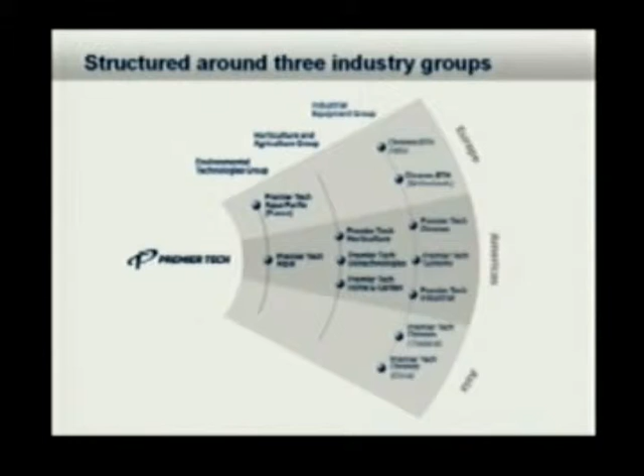Back to the Environmental Technologies Group, we work in smaller flow with the Ecoflo biofilter. Just to mention that if there is any commercial project, a small project, we can use 2 or more Ecoflo units, put the Ecoflo in cluster to handle small flow, let's say from 2 to 15 cubic meters per day.

We have a more commercial system, which I will discuss today, and we have municipal and industrial systems with the SBR, that is for sequencing batch reactor.

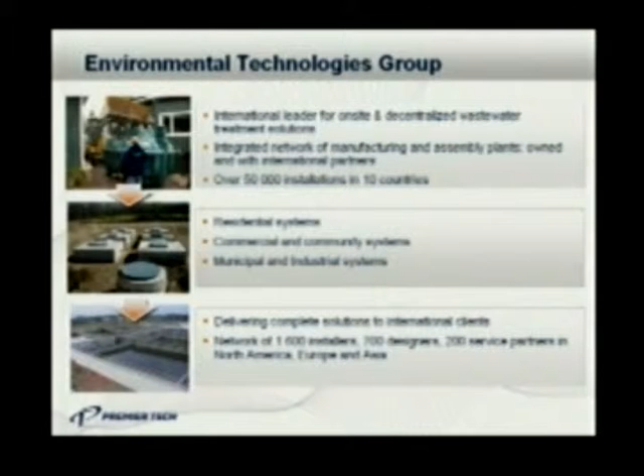The first product I will talk to you about is the Rotofix. If you have to deal with a domestic type of wastewater, if the requirement for effluent is not too high, in the 20-20 range for BOD5 and suspended solids, the RotoFix is a nice unit to work with. It's a RotoFix, it's an RBC, that's for rotating biological contactor. It's also known as a biodisc.

We developed the RotoFix based on the biodisc technology, but we wanted to improve the biodisc. There were some problems associated with biodisc in the past, one of them being the accumulation of biomass in between the discs. With our product, the media is parallel to the main shaft, whereas with a typical biodisc it is perpendicular. In the past, that perpendicular setup led to accumulation of biomass in between the discs, and eventually mechanical problems. With the RotoFix, because the media is installed like that, the biomass that accumulates on the support gets washed out, so there's no accumulation of biomass and no mechanical problems associated with that.

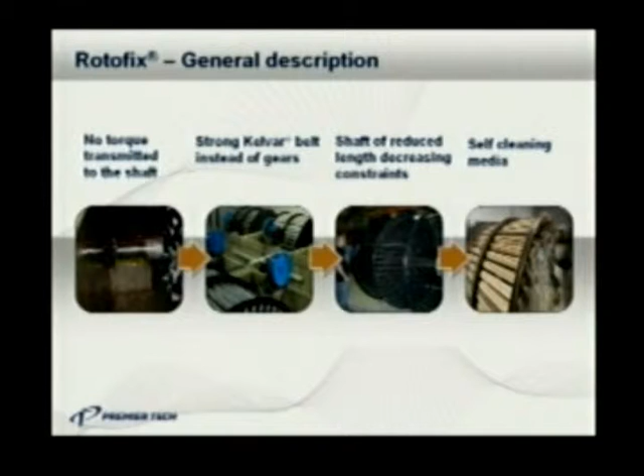So what you see is a very simple way to drive the drum inside the wastewater. It's an electric motor, gearbox, pulley, and a strap, basically, and it's all installed in a drum, and the drum is installed in the wastewater tank.

You see here the flow diagram. We have a septic tank, and then we have an equalization tank, because the wastewater is not generated evenly during the day, so there is peak flow during the morning and evening. We typically have an EQ tank to pump the wastewater to the wastewater treatment system. Here we use an agitator to mix the solids together with the liquid before we go to the treatment, and then after we have the treatment.

This is the treatment part here, and over there is a decanter. Let's check if it starts.

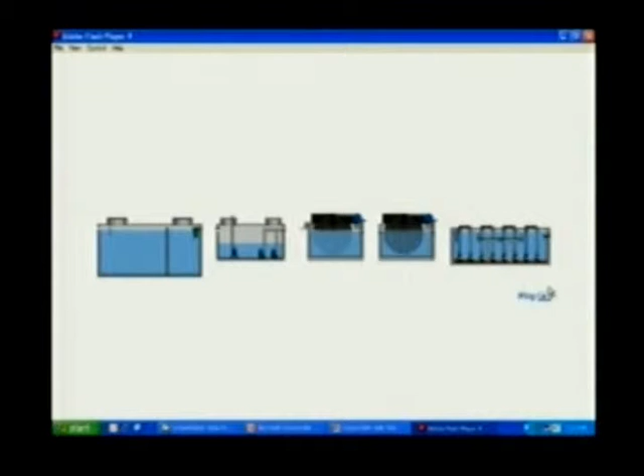So you have your septic tank. The solids will accumulate at the bottom of the tank, and the fat and grease will stay on the surface. Here we have an effluent filter in the septic tank. So we feed the EQ tank, and the pump will pump to the treatment system.

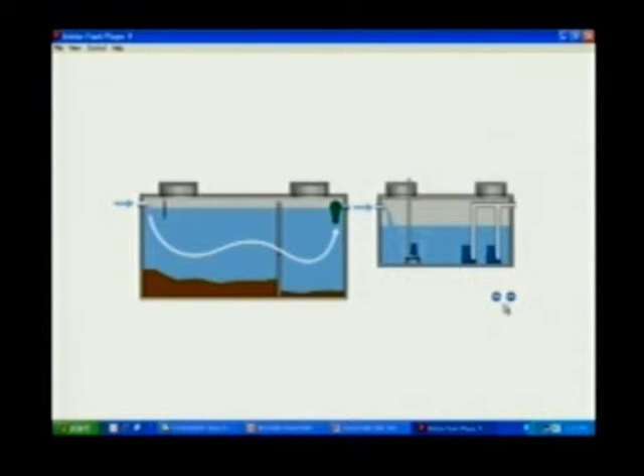In the RotoFix, you have rotation of the drum into the wastewater. When the media goes into the water, there is air in between the spaces in the media, so the air will blow out at every extremity of the media, giving you aeration. When the drum goes out of the water it will flow down into the system. That's a very economical and efficient way to have good aeration and agitation in wastewater.

The bacteria will grow on the media. They have food there, they have water, aeration, so that's a good condition for the bacteria to grow and to remove the contaminants from the wastewater.

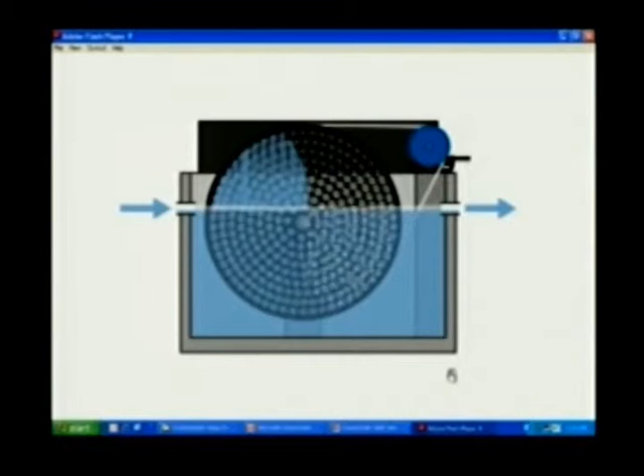After that, the water will go into the decanter. This is a device designed to separate the suspended solid from the wastewater. The bottom of the tank has a conical shape, and the sludge will accumulate on the bottom.

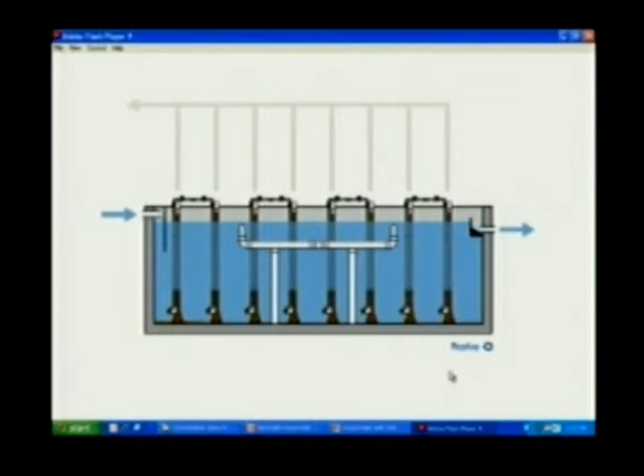Here there are two lines. One is a compressed air line that pushes compressed air, creating an airlift system, meaning that when you introduce air into the water, the density will be less, and this will pull the sludge together with the water upstream, eventually going to either the septic tank or a sludge tank.

In the decanter, we also want to remove floating material that accumulates on the surface, because sometimes gas is generated and some of the solid will float. We have a valve, and when we open it, the floating material goes to the same place as the sludges.

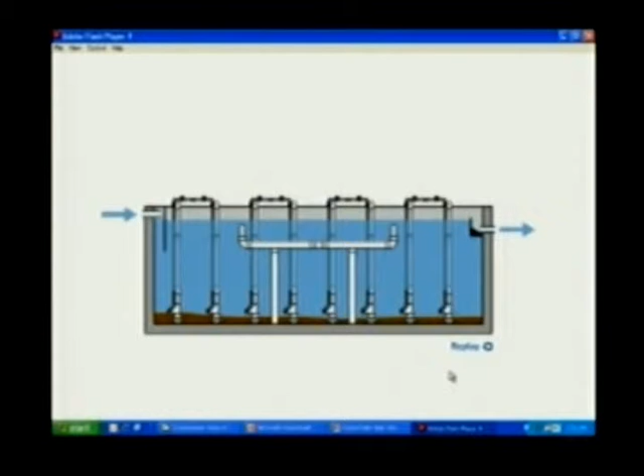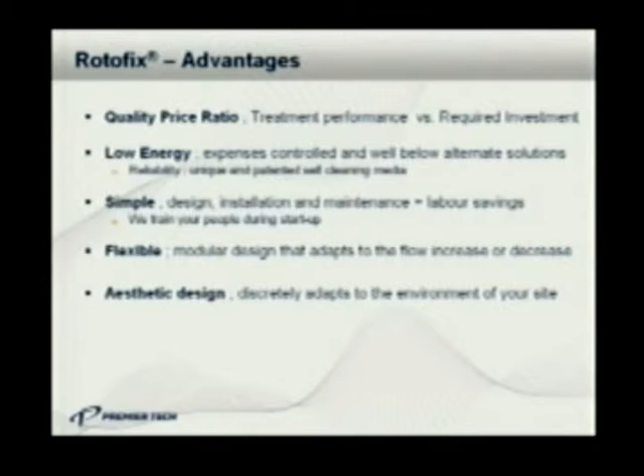The advantage of the Rotofix is a good quality price ratio, with a very low energy motor to drive it, either 0.5 or 3/4 horsepower. It's simple, flexible, and easy to operate. If there's a problem and the motor needs replacing, it's very easily accessible for the operator. And when we mention aesthetic, it's because we can install the Rotofix in a small building that integrates with the local environment.

Some case studies: Mont Saint-Sacrement School, 35 bedrooms, designed for around 70 cubic meters per day, started up in 2001. It was installed to replace a recirculating sand filter. Now what you see here is the small building - all the wastewater treatment is installed inside. It's just beside the gymnasium for the school, and there's no other problem associated with the installation.

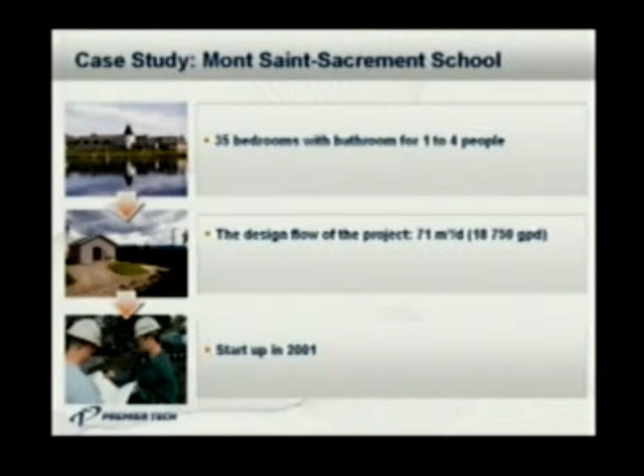Saint-Michel de Napierville is a township about a 20-minute drive south of Montreal. That's a new house development, about 100 homes, 125 in fact. The developer wanted to do an on-site system, but the soil condition was so bad it did not work - a lot of clay soil - and eventually the developer contacted us.

What we did was install an alternative system, meaning each house on this project has its own septic tank. So we can run a smaller diameter pipe than the conventional sewer system, and we don't have to go as deep in the ground because we can use a 1% slope rather than 2%.

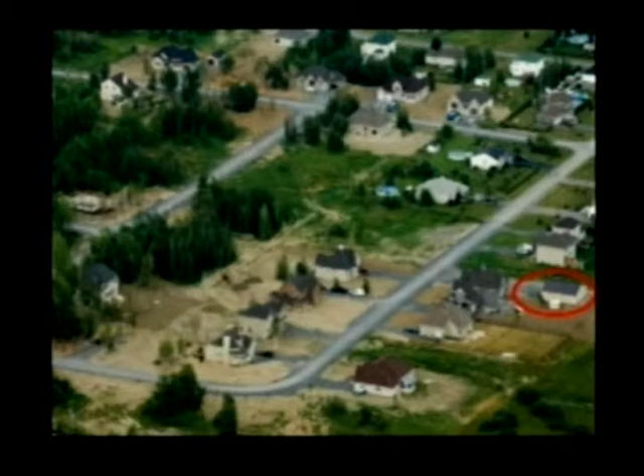We'll see it better on another slide, but here's the small building where it's installed. This developer did a second phase of the project and installed it in a different type of building because the new development has bigger homes. Just to show you, this is the wastewater treatment plant with the homes together - now it's a nice development that's all paved, and it has been in operation since 2006.

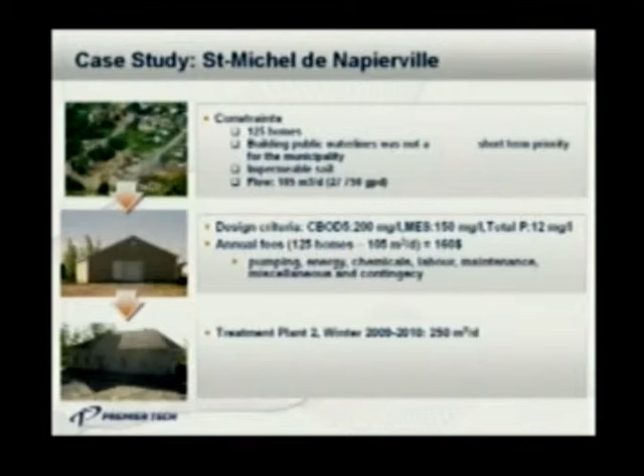I wanted to mention the operation cost of the system. Every home pays a local tax of $160 per year. This amount covers pumping of the septic tank every 2 years, pumping of the sludge tank at the treatment facility, as well as energy and chemical, because in this case they have phosphorus removal and use aluminum sulfate to precipitate the phosphorus into the last Rotofix.

Stanbridge East, 85 homes, a small township. This is a picture inside the treatment plant, 85 cubic meters per day. They have phosphorus removal and disinfection, using the same type of UV lamp that Danielle showed this morning, the Hallett lamp. Just to show you, we can arrange the plant so it looks okay - in this case, it has a sugar shack look.

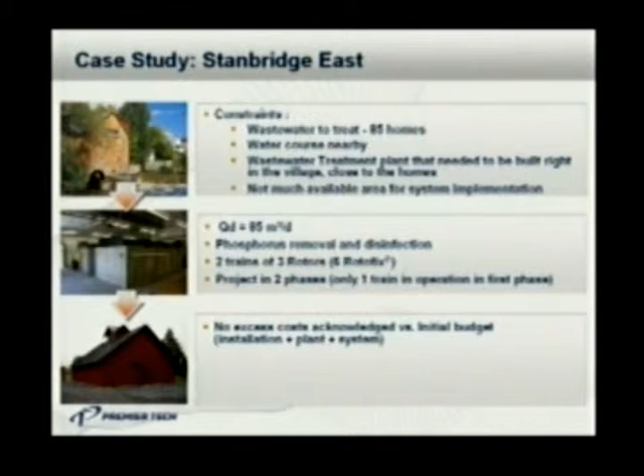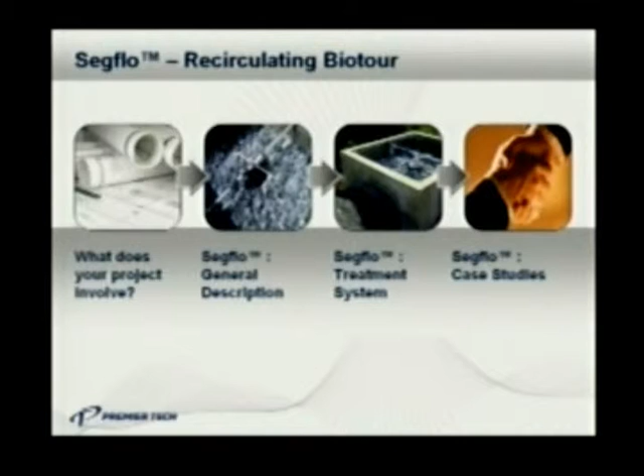Another product in our product line is the Segflo, a recirculating biotower. If the project involves higher strength wastewater, like a restaurant or grocery store, and if the flow is in the 5 to 100 cubic meter per day range, the Segflo is a nice technology to use. It can reduce the strength of the wastewater very much, and that's most of the time why we use this technology.

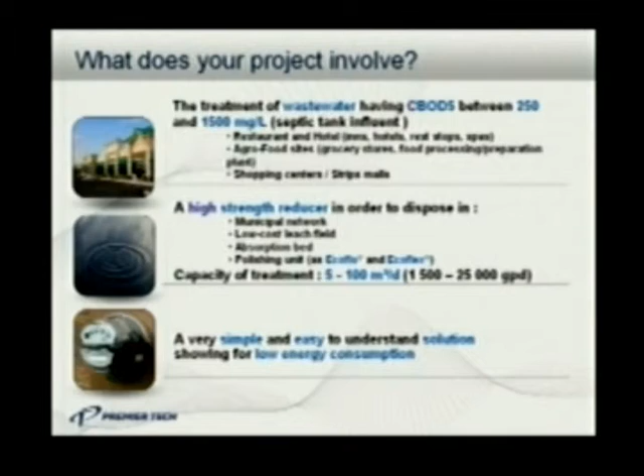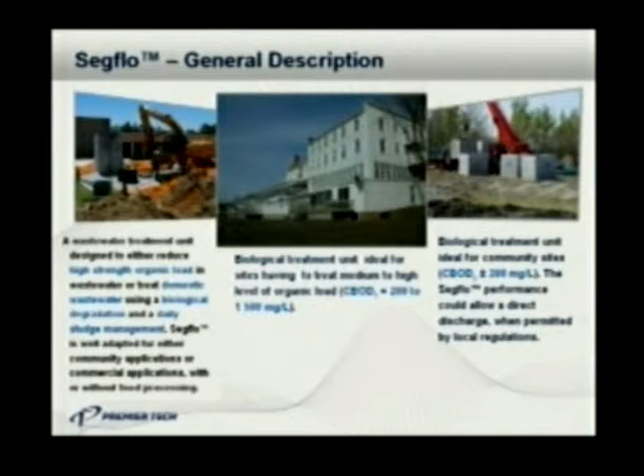How does that work? Again, we have the septic tank, EQ tank, just like with the Rotofix, but rather than use something that is moving as the media, with the Segflo we have a similar media as the Rotofix, but it's pieces of about 3 inches diameter and 3 inches long that is installed in bulk into the Segflo tower. The treatment happens in the tower.

Most of the time we will use a 2-stage tower. When we need extra capacity, we can use some systems in parallel to increase the capacity. And at the end of the system, typically we have a settling tank to remove suspended solids.

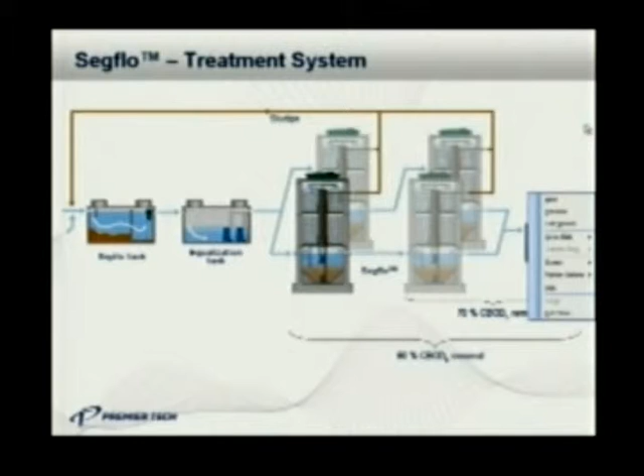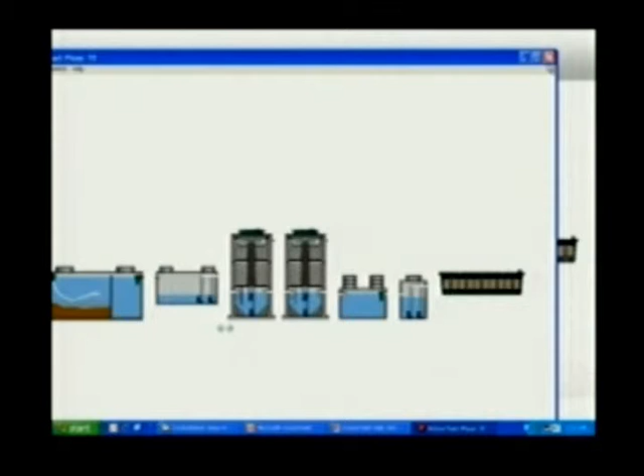Okay, and again we have the septic tank. We have the EQ tank that will feed the Segflo tower, and then after in the Segflo...

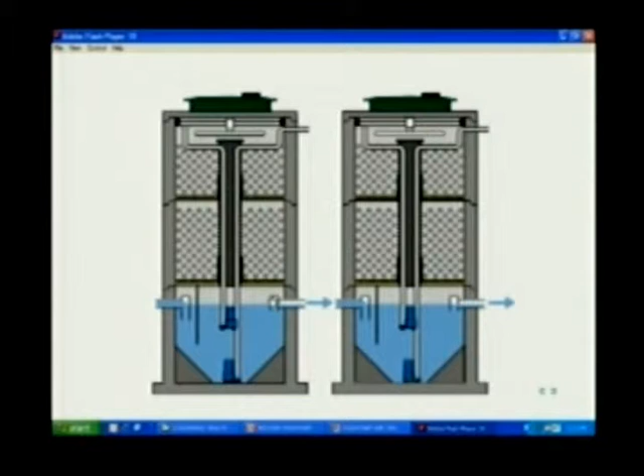we feed the system. There is one pump here that is a recirculating pump, and there is a rotating arm, just like in a dishwashing machine, that will spread the water evenly. I'll wait for the next step.

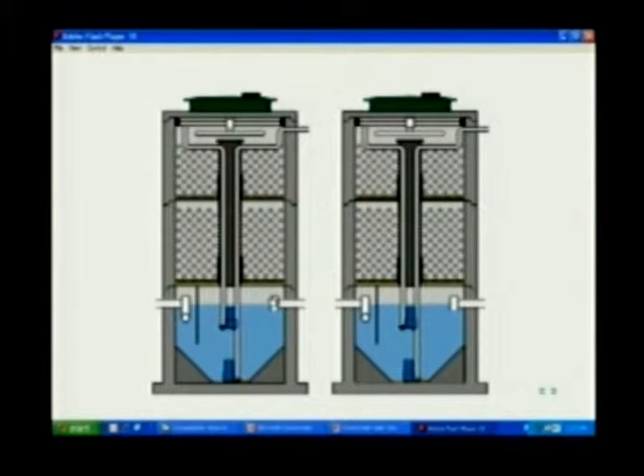So water goes up, rotating, distribution, treatment into the media, and after that there is sludge produced, and the sludge is pumped to a sludge tank or to the septic tank. That's key in this process, in all the processes, to remove the sludge, because any biological treatment system produces sludge. There is bacteria, the bacteria die, they produce a biological sludge. It has to be removed, because if it's not removed, it will accumulate and eventually clog a filter.

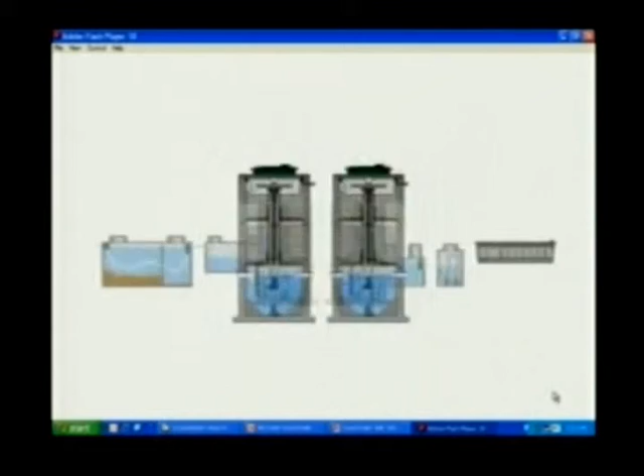After, you see the sludge coming back to the septic tank.

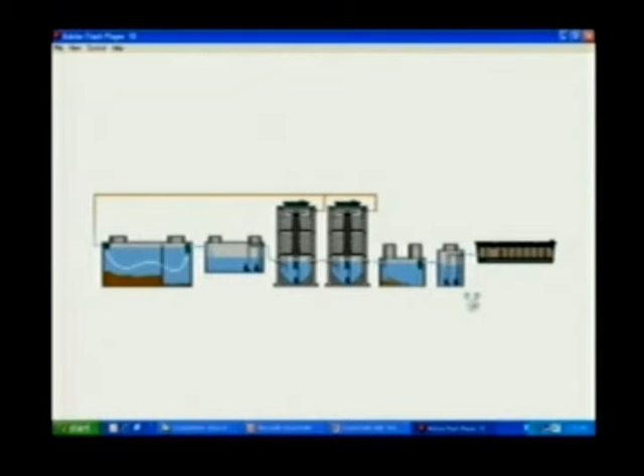After the SegFlow, we have a sedimentation tank, a pump. We don't always have this portion; this is when we need the polishing. In this case, it's polishing into what we call Ecoflo textile peat filter. Again, we have a pump that will spread the water evenly on the surface of the peat textile filter, and this will produce a very high quality effluent.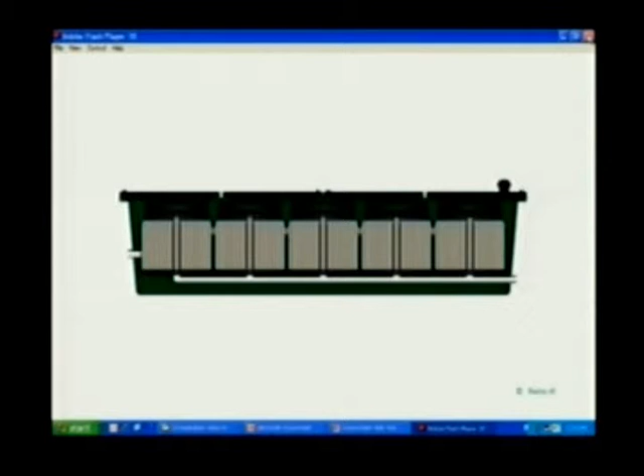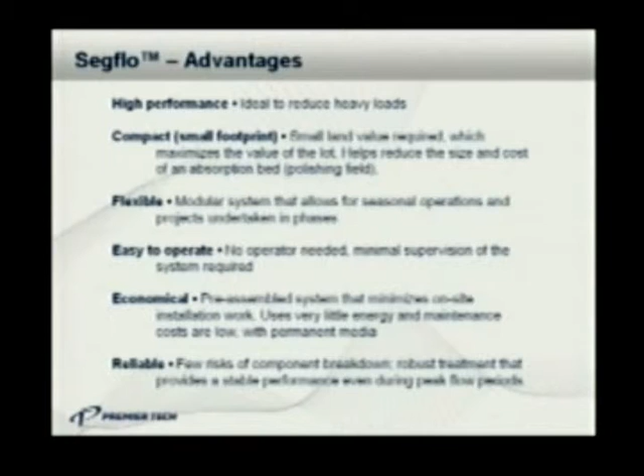So Segflo: high performance, very small footprint, flexible. We can deal with domestic type of wastewater as well as high strength wastewater. Very easy to operate — basically that's a few pumps, and it's all controlled by a control panel and a PLC. Very simple operation, economical again. Pumps do not spend a lot of energy, and it's a very reliable system.

There are kind of two options. It could be assembled at the precaster location, like these pieces. Typically these pieces are cast at the precaster manufacturing facility. The media is installed into the tank, and it is shipped together with the tank, and it is assembled on site. The other option, which we use a lot in projects in the Caribbean, is that we don't ship the concrete over there — they make the concrete locally, and we ship a kit of the Segflo over there.

Can you hear me over there? Yes? Because I think this is not working anymore. But okay, knowing that it's not working, I'll make sure that you can understand me.

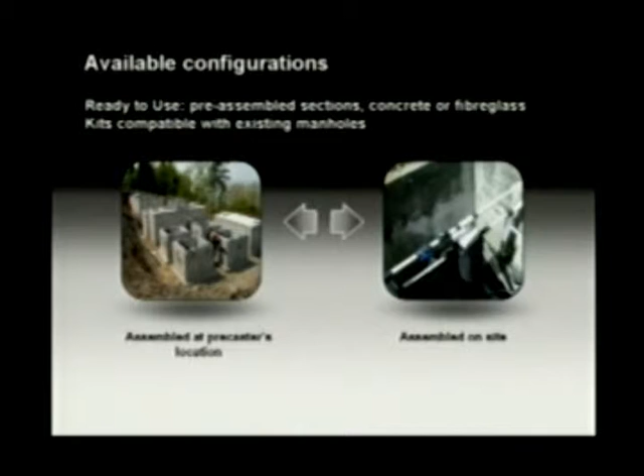So the two options: make the pieces at the precaster location, or have the concrete cast in place. In North America, in most cases, we will deal with precaster.

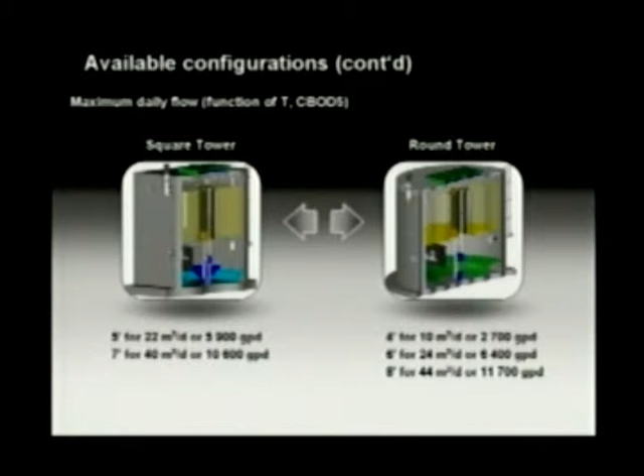Other picture of the installation at Notre-Dame du Portage. You can see that sometimes it's big tanks, big pieces of concrete, and it's installed quite fast. Typically we have the crane on site and good planning for delivery by truck. Typically we do everything the same — we put all the pieces together the same day. What you see over here, that's the EcoFlex unit.

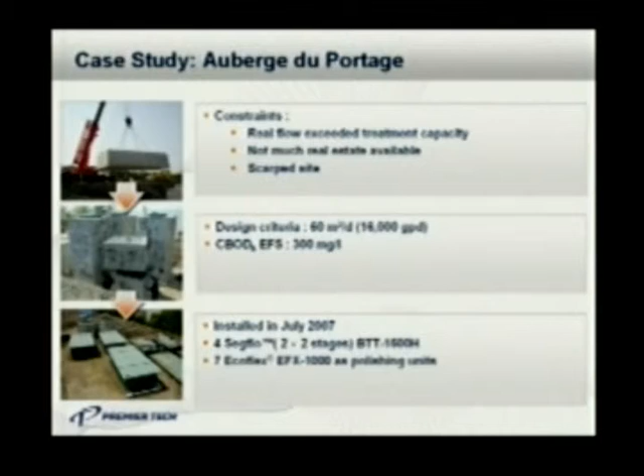Other case we did, that's in Martinique — a very small footprint installation. Typically there is one big septic tank or EQ tank or both, and then that's the tower, that's the control panel, and that's it. It's very easy to integrate that in the landscaping.

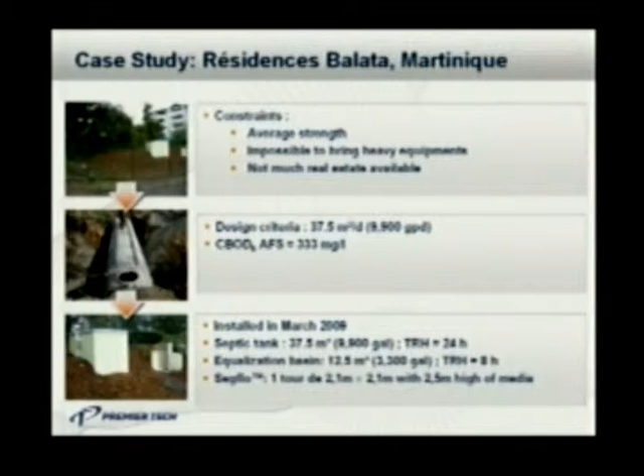Other technology that we are just bringing into the market now, even though we've worked to test it for more than 3 years, is the membrane bioreactor.

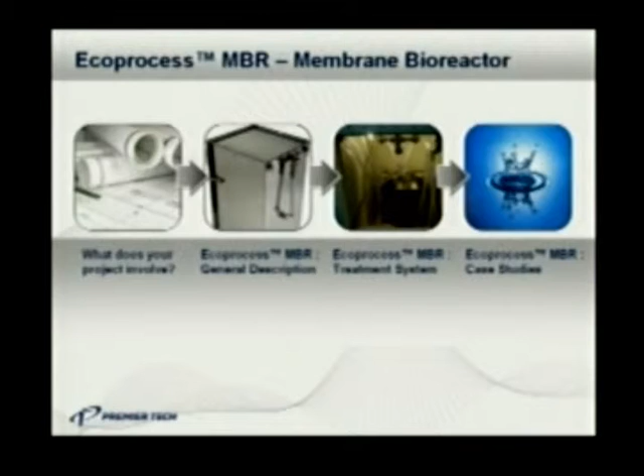Membrane bioreactor is typically used wherever there is a very sensitive area, because it can produce a very high level of treatment. If there is a high requirement in BOD5, suspended solids, phosphorus, total nitrogen, or disinfection, membrane technology is a very good way to go.

Membrane is well known from the past, mostly for drinking water. It has been used for many years, and now it's been used in the wastewater industry for about 10 years, exactly for the sensitive area reason.

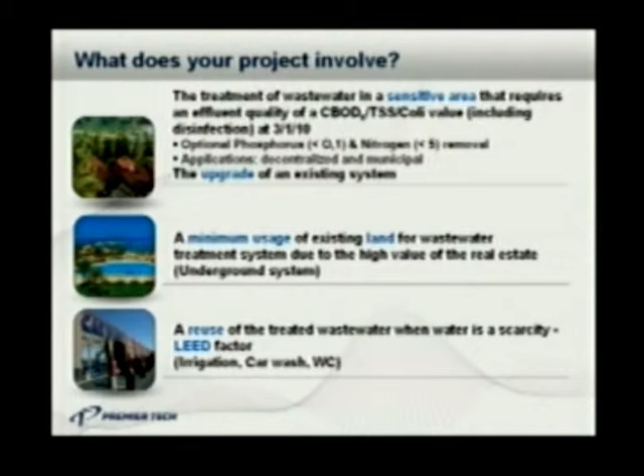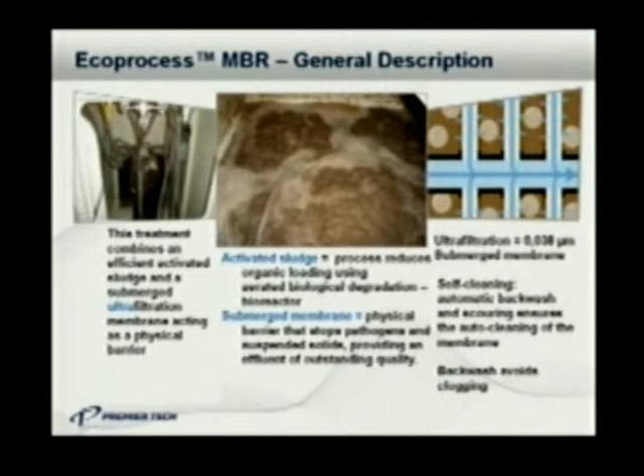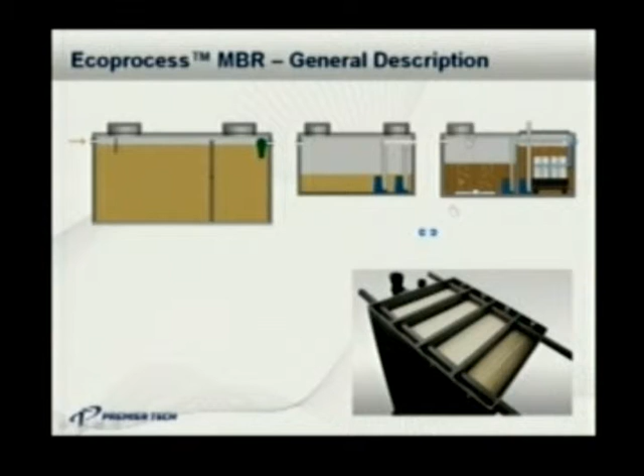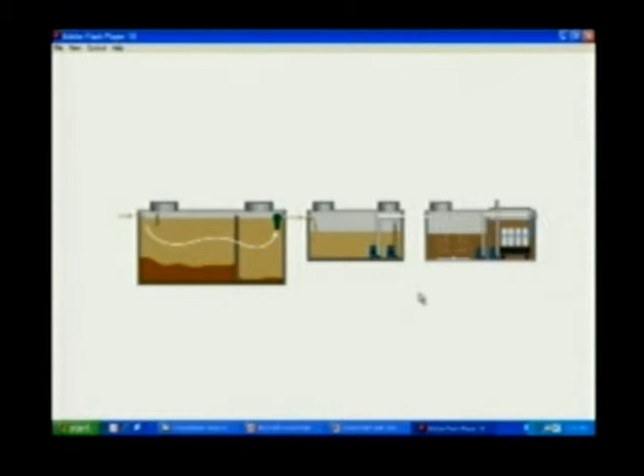You see again the septic tank, dosing tank, and we feed the MBR, so water will go there for aeration. Eventually this pump will stop. There's a different configuration, but this is a small compact configuration.

The membrane can take so much water, so any overflow will go back into the reactor. This is connected to a pump, a positive displacement pump, so it can go one way or the other. It's normally used under vacuum condition to pump the filtrate out of the membrane, but we have a sequence where we can reverse the pump to do a backwash on the membrane to keep it clean.

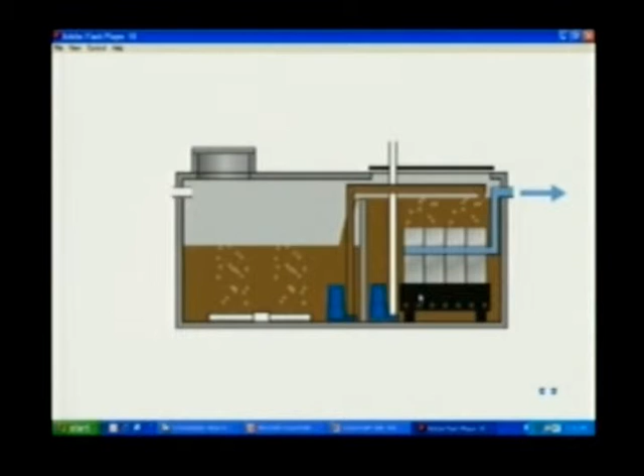In addition, we can use chemicals for a chemical washing over the membrane. That's done once in a while, typically once a month, using chlorine and/or citric acid to clean the membrane. The chlorine removes biological material, while the citric acid is used more to remove calcium that can clog the membrane.

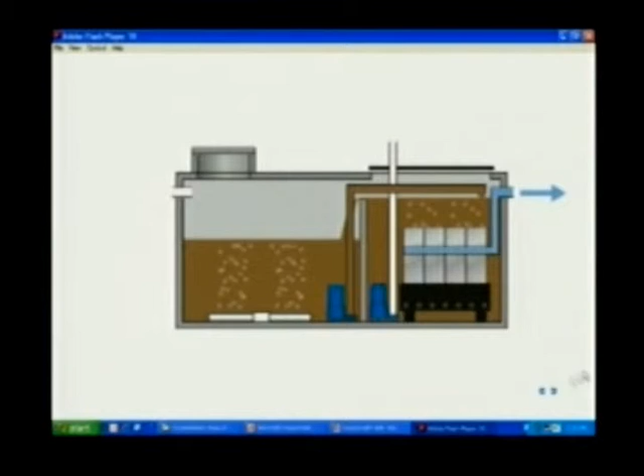Just so you can see, that's the flow of treated water outside the membrane. That's the membrane, that's the scouring process that keeps the membrane clean, and that's when we do the backwash of the water.

Can you still hear me? Okay.

So that's an automatic process that keeps it clean.

The MBR is a very good technology. We use flat sheet membrane, and there are advantages of flat sheet membranes compared with hollow fiber membranes. The flat sheet membranes are very robust, they can be cleaned well, and they don't require too much manual cleaning. They are not sensitive to hair and fibers.

That's something that happens with hollow fibers. Those of you who know hollow fibers, they're like macaroni - they float in water and fibers will stick on them. The flat sheet membranes are more robust than the hollow fibers.

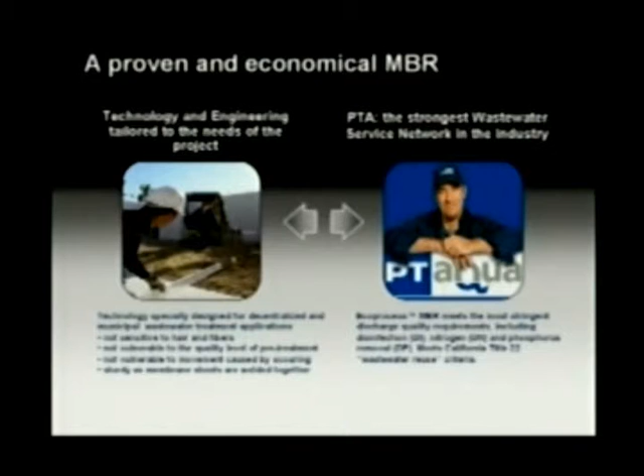With the membrane, we can meet very high quality effluent, doing phosphorus removal typically down to 0.1 ppm. We can do nitrogen removal, and typically we meet California requirements for water reuse.

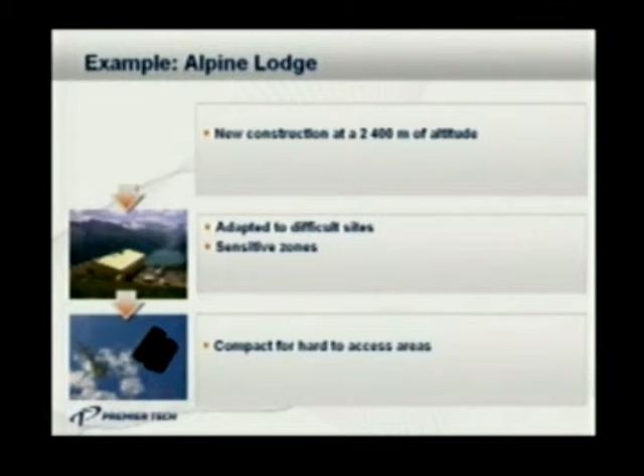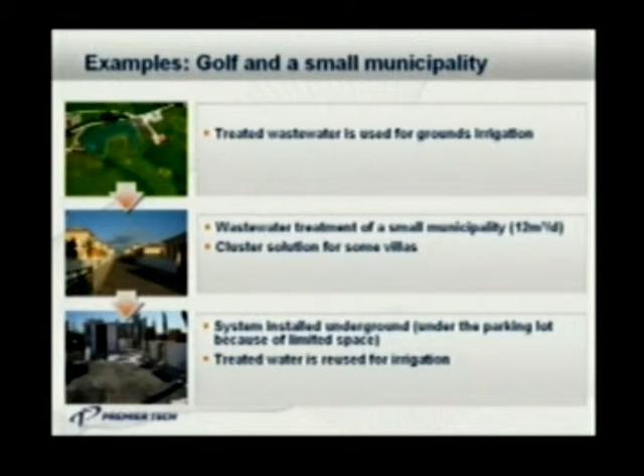Some examples here are from our European partner from Germany. Lodges in mountains, where they have to airlift the equipment. Golf courses and small communities or municipalities are also some types of projects we can do with membrane technology.

This is the last technology that I will present to you, one that we know very well at Premier Tech. Premier Tech acquired Ecoprocess and Equipment in the year 2000, and they had more than 20 years of experience dealing with sequencing batch reactors for both municipal and industrial wastewater.

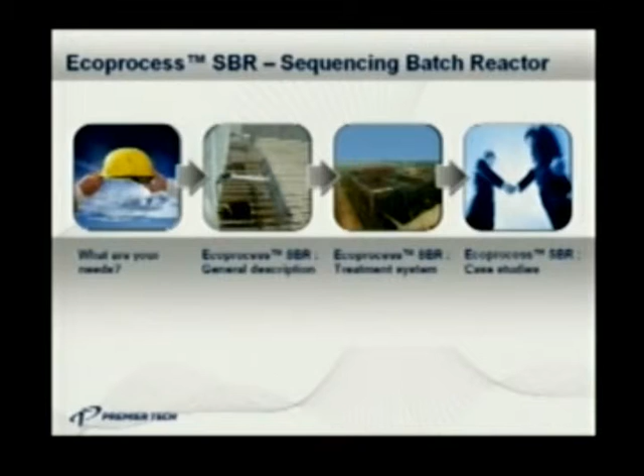With the SBR we can also reach a high level of treatment. We can do nitrogen removal, phosphorus removal, disinfection - all of these are options that can be used with SBR.

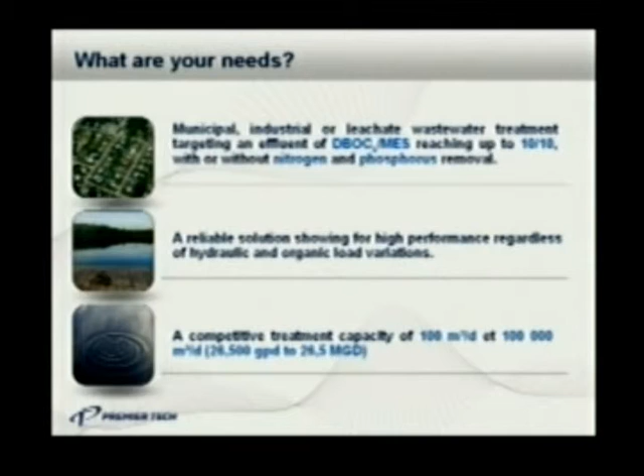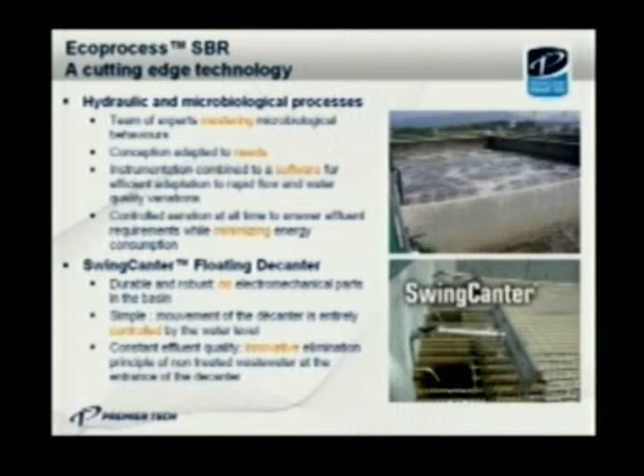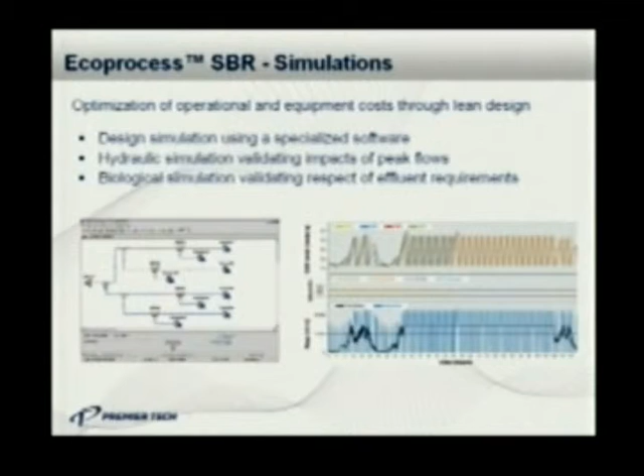Just briefly to mention that we have all the different tools to do simulation or modeling of the system, because we have to deal with a biological system. We use BioWin as a tool to size our system, and we have to work on hydraulics as well.

We typically, with SBR, have a SCADA system, meaning the PLC is connected with a computer where we can acquire a lot of data and do reporting. We can do a lot of things with that.

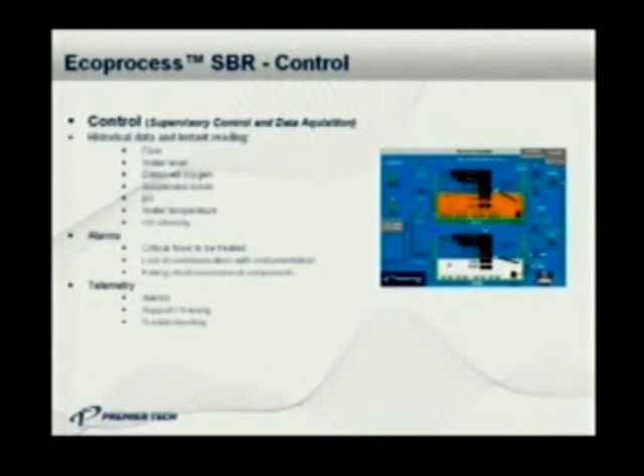Very often there is a lot of equipment we can add, like dissolved oxygen sensors and suspended solid sensors, and that information goes back to the PLC so we can adjust our sequences accordingly.

There are different approaches for SBR, depending on the type of wastewater and the quality of effluent that we need. I'll show you two different approaches.

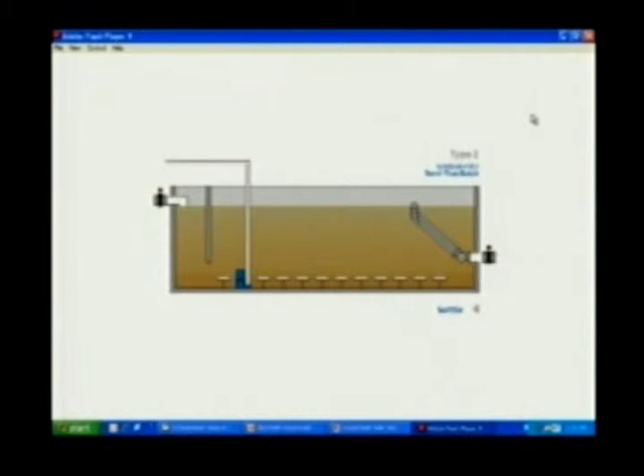One being gradual fill, meaning we fill the reactor. That's typically a big concrete tank, though it could be a steel tank. We feed it, we aerate it, there is sludge removal from the system, and eventually we stop aeration and the water will clarify, from the top to the bottom.

This device is also very important, we call it the swing decanter. It has kind of a two-pipe system. The top pipe is a float, like an airplane float that floats on the surface of the water.

The clear water, when we stop aeration, is always just below the surface, which is why the suction pipe is always well located in the SBR. It's simpler than the more conventional mechanical decanter, and it's all controlled by a valve over here.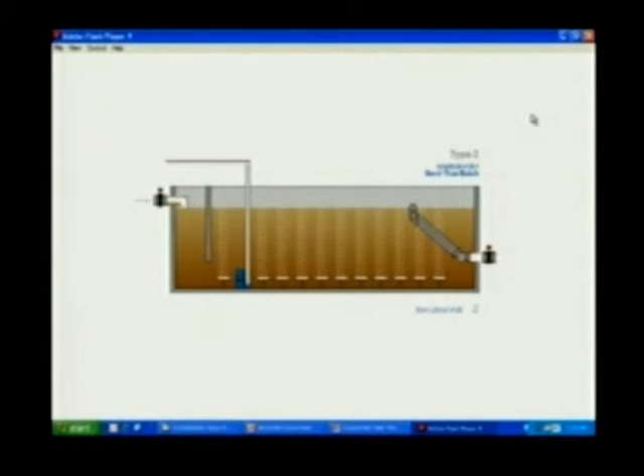Typically the type 2 system uses at least two SBR in parallel. Having two SBR, we switch from one to the other, so there is always one system feeding. Also, having two SBR, whenever it's time to do maintenance we can bypass the flow and use one to process while doing maintenance on the other.

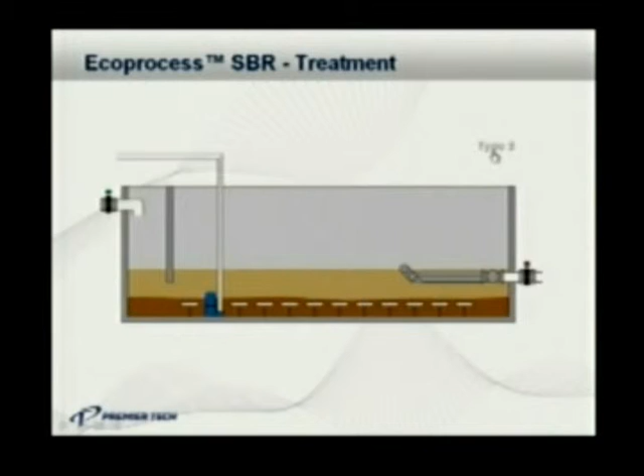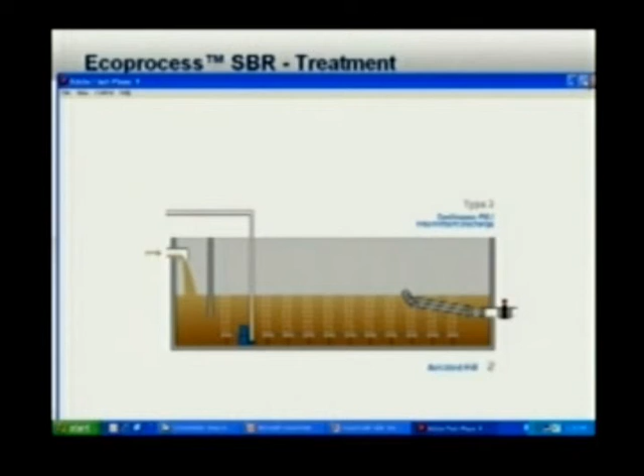Type 3 system, we use mostly for big municipal plants like in China, where they don't need as good quality effluent. We constantly fill the system here, but we have intermittent discharge, so it's always feeding over here, but we have a baffle wall to avoid any bypassing of untreated water directly into the main reactor zone.

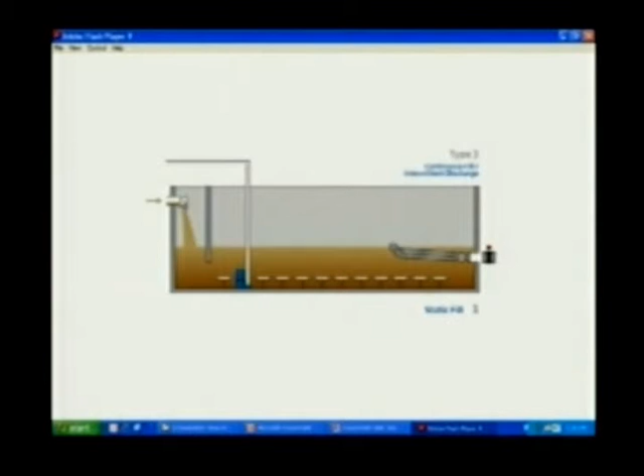Again, we have aeration into the system, the floating decanter that floats at the surface, and a cycle controlled by the PLC before we open the valve to let the treated water go to discharge. Typically we're talking about big flows, 10,000 cubic meters per day. We have a system running right now in China at up to 60,000 cubic meters per day, so we can handle big flows with this type of system.

Just to mention that here in Nova Scotia, in North Preston, there is an SBR, our SBR, installed over there.

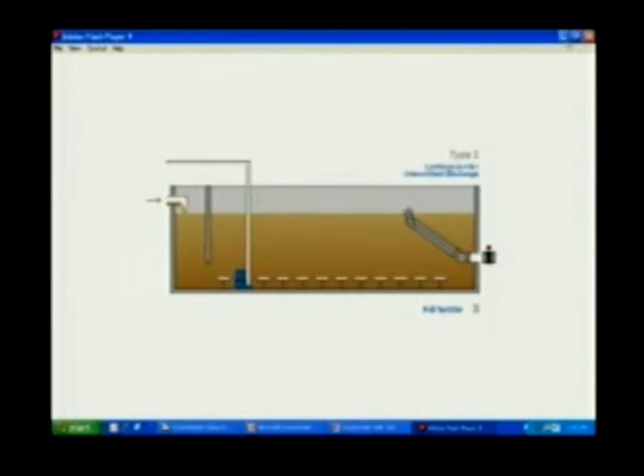We have a process engineer. We are based in Lachenaie, and you can always get in touch with us. We give good support to a local engineer who will design an SBR project with our technology.

Our equipment includes floating decanter, air compressor, sensors, SCADA system, and remote technical support. For most of this type of equipment, we strongly suggest having telemetry on it, whether an internet connection or now a phone or cellular mobile connection, to be able to get connected to the control panel and give support from far away.

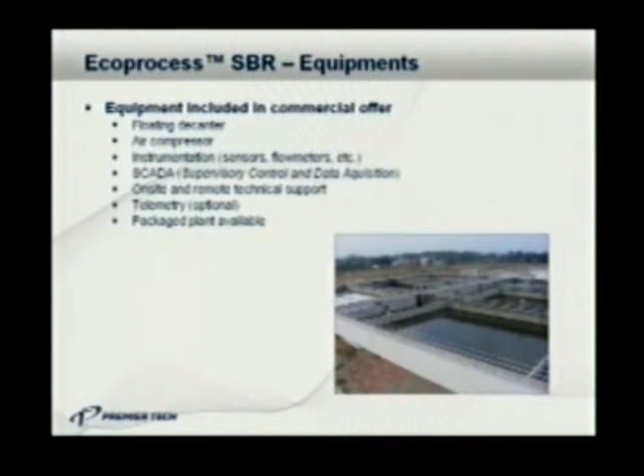We are regularly in contact with our partners in Asia or overseas. We also have package plants available for smaller projects, like worker camps, for example. We have a package plant available.

So we have a good track record. The systems are much more flexible, able to deal with big fluctuations in flows. For example, if there are high flows during a rainy season or at spring, the system is able to deal with that. And we have very long-term expertise, service, and support with this technology.

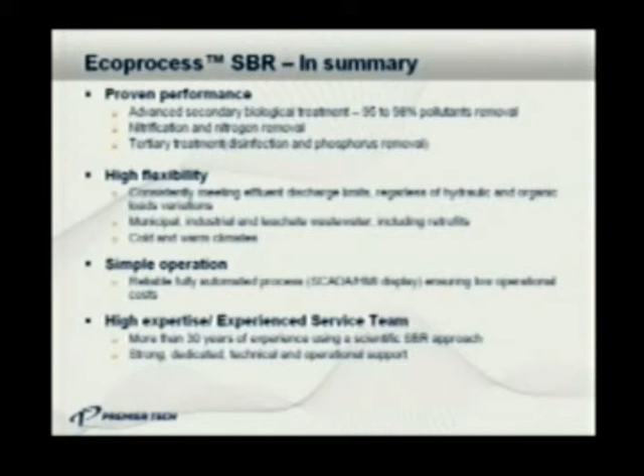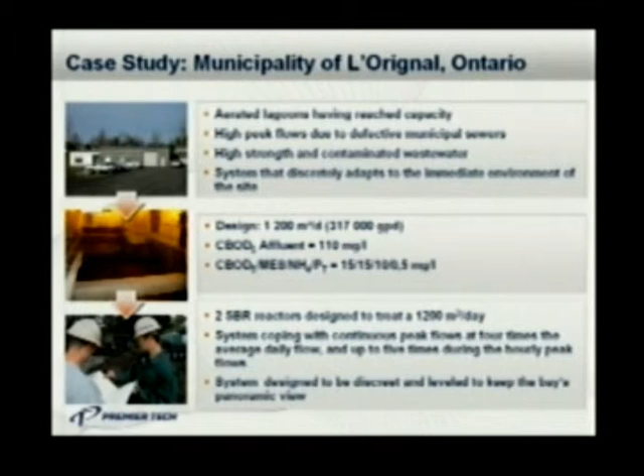1,200 cubic meters per day. The influent BOD5 is a bit more than 100, and the outlet requirement is 15, but most of the time we are more like 5 and 5 for BOD5 and suspended solids. There we have two reactors in parallel.

This is a picture of the portable or mobile equipment. We typically use a big stainless steel tank, in which some of the tanks are used as a septic tank, and some are used as a reactor for the SBR. So it's all on skids, it can go on the road. It can be installed at a worker camp site, and when the camp is dismantled, they can take the equipment and go to another site.

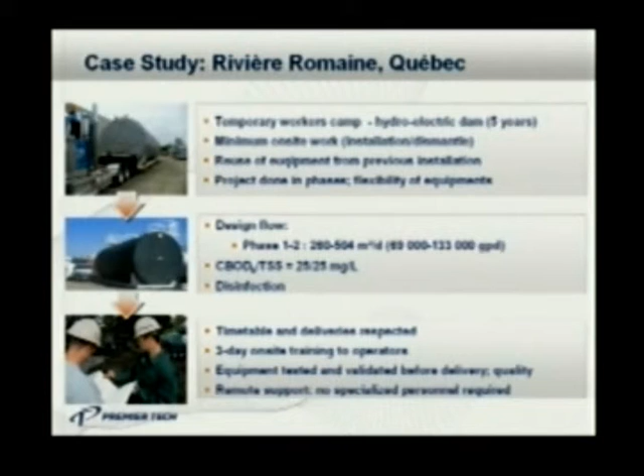For example, right now we have equipment installed at La Rivière-Romaine, a hydro project in Quebec. They took the equipment from Péribonka, another project, and moved it to La Romaine. After 5 years, they will have to leave the site in the right condition, so they can just remove the equipment and take it somewhere else.

So that's just an overview of the different technologies that we have. As you can see, there are different ways to treat wastewater. What I want you to keep in mind is that here in Nova Scotia, Shaw is our partner, and you can get in touch directly with us or with Shaw for any project involving small, medium, or even large flow. Do you have any questions?